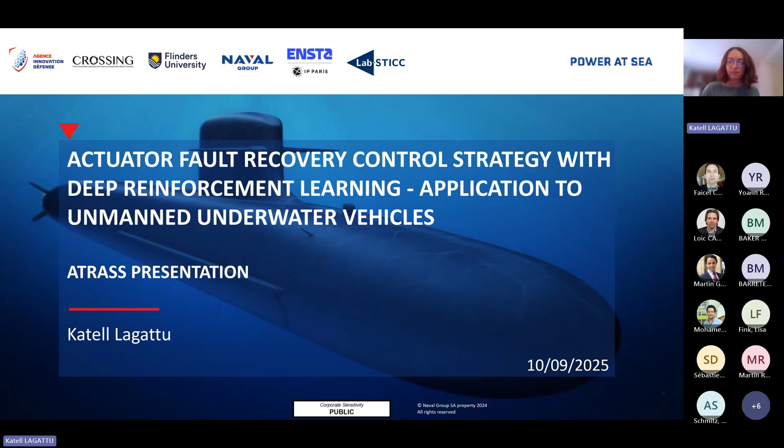My name is Katell Lagattu, and I'm going to present my PhD, which is entitled Actuator Fault Recovery Control Strategy with Deep Reinforcement Learning, Application to Unmanned Underwater Vehicles. So let's start with a little bit of context.

My PhD is a Naval Group CIFRE Defense PhD with ENSTA Bretagne in collaboration with Flinders University. So I spent the first 6 months of my PhD in Naval Group at Ollioules. Then I spent 1 year and a half in Australia at Flinders University. And I finished my PhD for the last year in Brest at ENSTA Bretagne. And I will officially end my PhD at the beginning of next month.

So for this presentation, I will start by giving a small overview of the general problem. Then I will briefly talk about the state of the art, which will lead to the research statements. Then I will explain my proposed approach that will be tested on an application case. And I will finish by showing you some of the results that we obtained, both in simulation and in real world.

So first, let's start with the general problem. So we consider in my PhD autonomous dynamic systems controlled by model-based controllers. We can see here a classical closed-loop control with a controller relying on the feedback from the system dynamics to perform the desired motion. The model-based controller is based on this classical evolution equation, with f the evolution function of the system, which is known during the nominal condition.

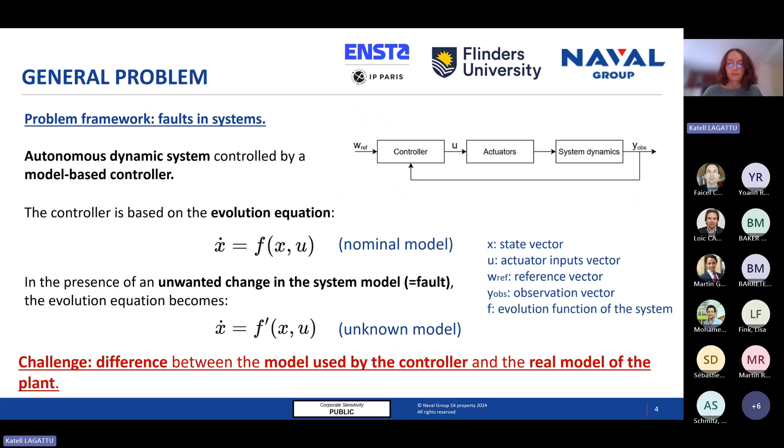The challenge here is that there is a difference between the model used by the controller, relying on f, and the real model of the faulty plant, which relies on f prime, that we don't know. This can lead to the risk of mission failure of the system, or in the worst case, the loss of the system.

So there are different types of faults that can occur in autonomous dynamic systems, for example, software faults or sensor faults. But in my PhD, we focus only on actuator faults. They can be partial, for example, a loss of efficiency of one actuator, or they can also be total faults, like a total failure or breakdown.

We make a few assumptions to start with in my PhD. The first one is, as we focus only on actuator faults, we will assume that there are no other disturbances, so no other fault and no external disturbances like marine currents or wind or anything. We also assume that the faulty system remains controllable, which means that the system has enough other actuators to be able to move in the desired direction despite the fault.

The objective of my PhD is then to develop a strategy to overcome actuator faults. This leads us to explore fault-tolerant controllers, which are controllers designed to recover from faults. The goal of fault-tolerant controllers is to address some key characteristics. The first one is optimal recovery performance, which is how well the system can perform despite the fault. There is also stability of the closed-loop control, which is essential.

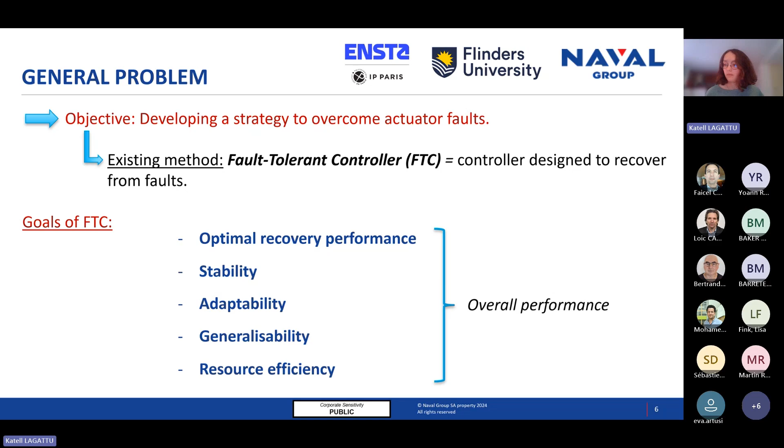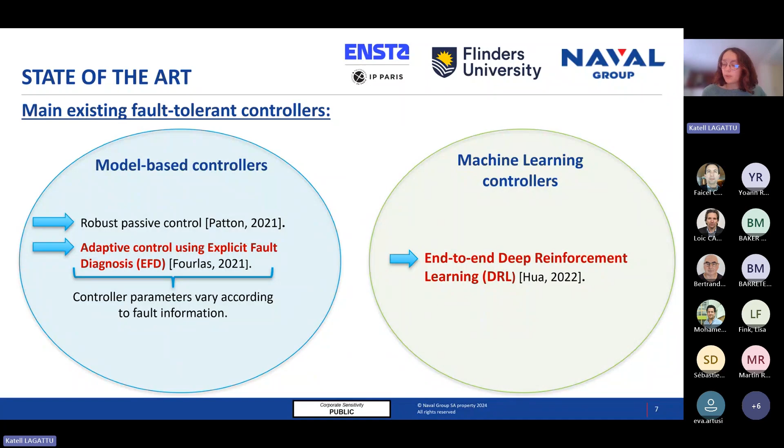And now let's see what already exists in the literature. There are two main categories of fault-tolerant control, model-based controllers and machine learning-based controllers. Among the model-based controllers, we can find robust passive control, but the most commonly used is adaptive control using explicit fault diagnosis, or EFD. In this method, the controller parameters vary according to the fault information. Among the machine learning controllers, the most used method is end-to-end deep reinforcement learning. So now we'll see in a bit more detail what these two main methods mean.

First, what is adaptive control using fault diagnosis? The first step of this approach is to obtain the fault diagnosis. This includes isolation, so the information of which actuator is faulty, and identification, which is obtaining the information of the extent of the fault. So for example, it can be the coefficient modeling the loss of efficiency of one actuator.

So it's important to note that EFD can be based on prior knowledge about the system model and the fault, or it can also be based on online estimation. So this means that it can also be estimated during the mission. Once the EFD is obtained, a control reallocation is performed based on EFD. So before talking about control reallocation, let's first understand what control allocation is.

So classically, in a controller, we have two different blocks. The first block is the control law, which takes as an input the observation from the system and which outputs the desired forces and torques, tau. And then the second block is control allocation, which converts the desired forces tau into actuator inputs U. And this is done through the control allocation matrix, H.

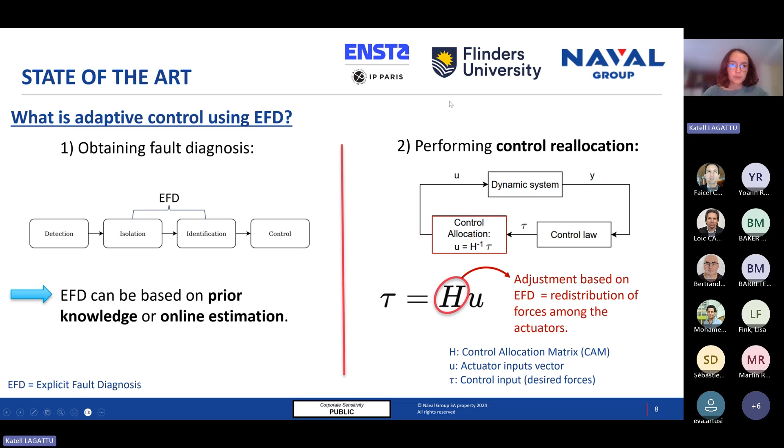So now to understand the second type of existing method, we need to see first some key elements about what is reinforcement learning. So this involves an agent trained in an environment through trial and error. At each step of the training, the agent will take one action and will have from the environment a new state and reward. This is all done in the framework of a Markov decision process. And the goal of the agent is to learn a policy of action which maximizes the long-term cumulative rewards.

Basically, at the start of the training, the agent will take random actions because it will not be trained at all and will not reach the objective of the mission. Then, after a while, the agent will be able to take more meaningful actions because it will have updated its policy of action. So for example, it will be able to reach the waypoints, but not in an optimal way. And then if the training is efficient, at the end of the training, the agent will be able to reach the waypoints in an optimal way because it will have found a policy of action which is optimal and which maximizes the cumulative reward.

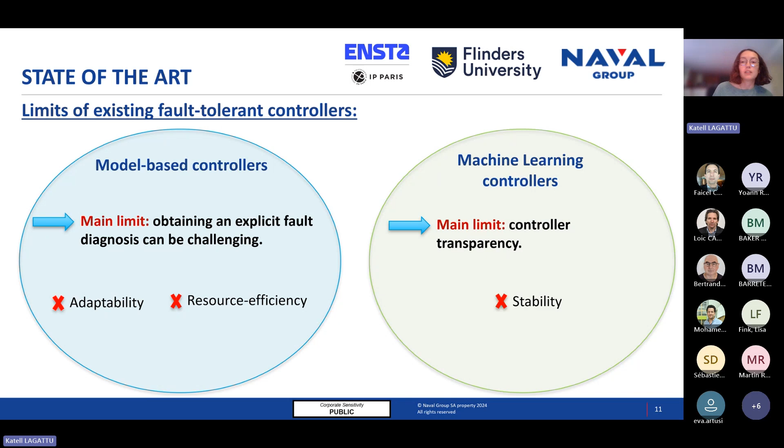Regarding the machine learning controllers, the main limit is the controller transparency, because neural networks are made of interlocked nonlinear functions, so the stability is very hard to guarantee. We often use the image of a black box of which we can't guarantee or predict the outputs. So this is why in my PhD, I made the choice of using a hybrid controller with both the advantages of model-based control and machine learning-based control to have both adaptability and stability.

This leads us to the thesis statement, which is: the combination of DRL and model-based control improves the overall performance of an autonomous dynamic system subject to actuator faults compared to existing methods. The main contribution in my PhD is the development of an adaptive model-based controller using DRL to adjust the control allocation matrix based only on observing the system's behavior.

So for the DRL part, the goal for the agent will be to learn how to adjust the allocation matrix, so to perform a control reallocation based on the observation of the plant. So this will allow us to have the adaptability of the DRL, and also this allows us to bypass the need for fault diagnosis. So why is that? It's because the agent will only rely on the observation of the behavior of the system. So basically position, orientation, and velocities.

The agent will not have any access or any need for the fault information. So it will not need to know which actuator is faulty or the extent of the fault. It just needs to observe the plant. And we will integrate this control allocation based on DRL into a model-based controller. So I will show you a bit later how it is done. And this will bring a certain stability.

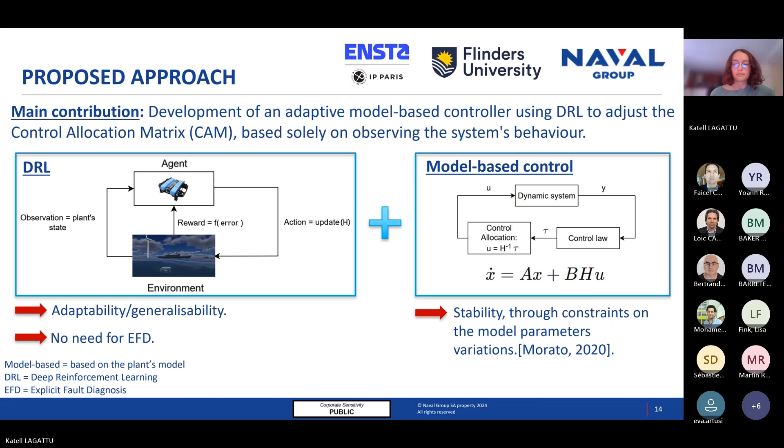We want to do that because it enables to maintain an optimal control in nominal situations, because we don't need to add the uncertainty linked to the DRL when we don't need it, when there is no fault. And also because it can reduce the number of scenarios that the DRL is supposed to learn during the training. So it's not supposed to learn the nominal conditions.

The detection threshold is defined and depends on the considered system. And it's important to note that it is very different from a diagnosis. We are not performing a diagnosis here. We just need a binary indicator saying if there is a problem in the system or not. So it's just about observing the behavior of the system.

So here is the structure of the proposed hybrid controller. We have a reference vector, which includes the desired movements, then a model-based controller, which integrates the control reallocation process. The control reallocation process is performed thanks to a trained DRL model that was trained in simulation. And we also add a post-processing step.

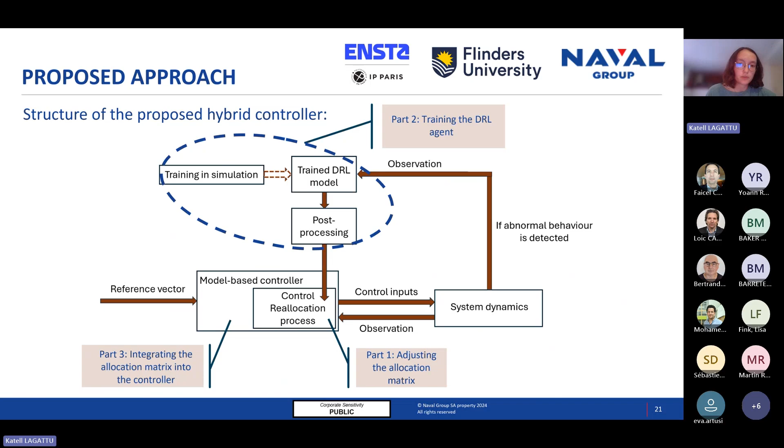So in order to ensure the stability of the closed-loop system, the control allocation matrix H must be included in the controller gain computation. For this, the controller gain, that we note K here, will be computed not only as a function of the classical matrices A and B, which are the state and input matrices, but also as a function of the control allocation matrix that we integrate in the equation. And this control allocation matrix is adjusted by the DRL. So basically, the gain K is calculated to ensure stability, and it will be a local stability because it will be recomputed at each time step.

We can see here a summary of the whole process. At each time step, the DRL model will receive from the system an observation and will produce an action, which are the weights. The weights will adjust the control allocation matrix integrated in the computation of the gain K. And this gain K will be used to compute the actuator inputs of the system.

So it's interesting to note here that contrary to classical control, where there are two blocks, one block for control law and one block for control allocation, here we have only one big block because we integrated the control allocation process into the control law. So this means that there is only one block which outputs directly the actuators' inputs.

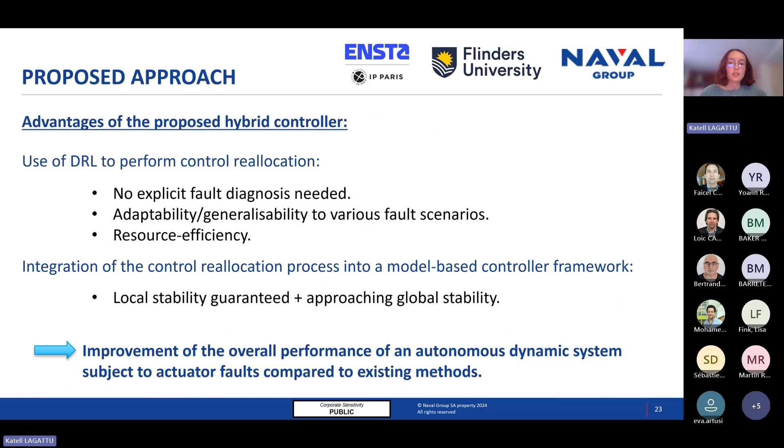And now we need to test this method on an application case. The application case that we chose here is autonomous underwater vehicle and thruster faults. We chose the BlueROV2 Heavy for the autonomous underwater vehicle, which is an AUV which has 8 thrusters and which can be used in defense applications, for example, mine detection or covering area or reconnaissance.

So here we can see the actuator configuration of the BlueROV2 Heavy. So it has 8 thrusters, 4 horizontal and 4 vertical. In my PhD, the focus is on the 4 horizontal thrusters that we name T0, T1, T2, and T3, and which control X, Y, and yaw directions.

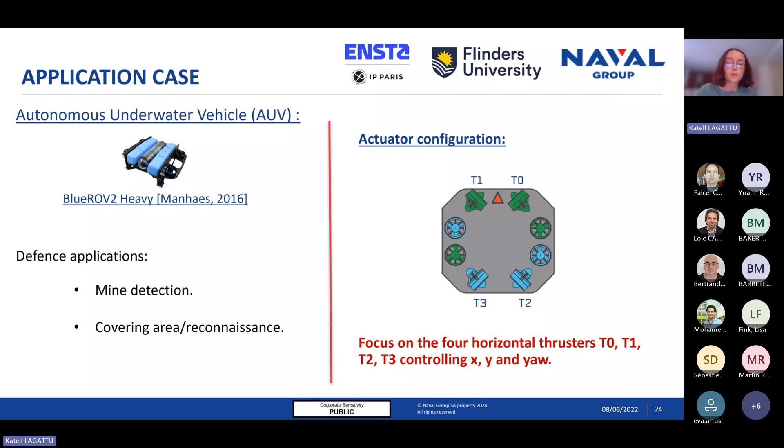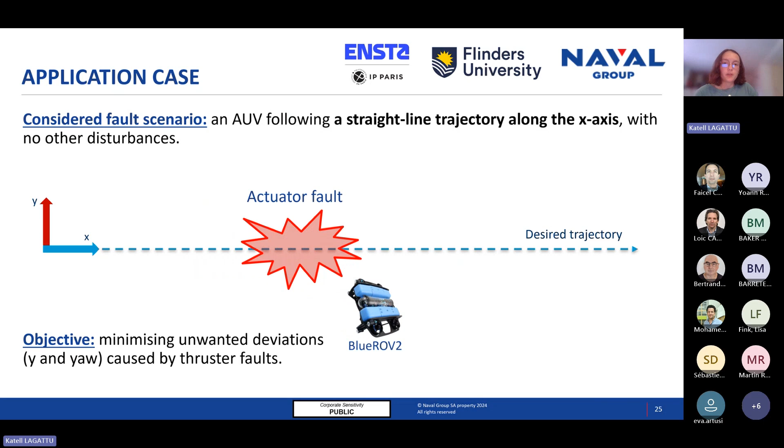So let's consider this fault scenario. We have this AUV following a straight line trajectory along the x-axis with no other disturbances, so no wind and no currents. An actuator fault occurs during the mission, which leads to translation errors and rotation error along the y and yaw directions. And the objective is to minimize these unwanted deviations along the y and yaw axes caused by thruster faults.

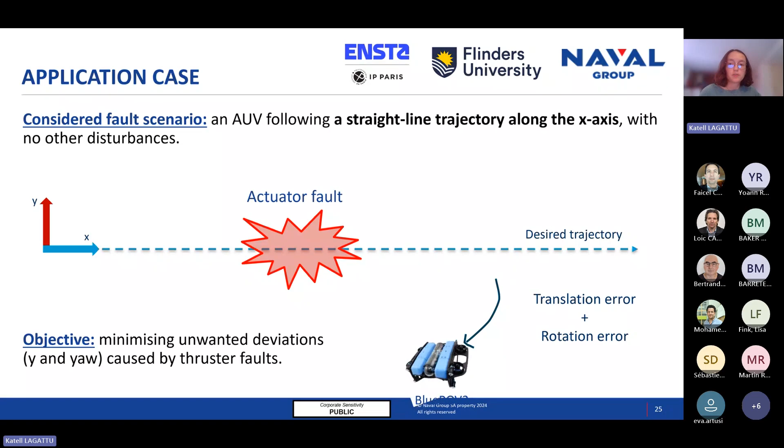To apply the proposed approach to the BlueROV, we need to make some technical choices. The first one is the choice of the model-based controller. We chose for this the linear quadratic regulator, or LQR controller, because this is a standard controller for linear systems, and the stability is quite straightforward to guarantee. For the choice of the DRL algorithm, we chose the soft actor critic, and we validated this choice in a first article for a conference.

For this application case, we added a working hypothesis. We assumed that the state of the AUV, so position and velocity, is known, because as we focus on control, we assume that the navigation part is okay.

Now, for applying the proposed approach, as we focus on a scenario where we only follow the x-axis, we will consider only the first line of the control allocation matrix, which is associated with the x-axis. So the DRL model will output only 4 weights W. And the weights are the output of the DRL model trained in simulation.

Now, in order to apply the proposed approach, a DRL training has to be carried out on the BlueROV2 Heavy. The issue that arose in my PhD is that training DRL models directly on physical AUVs is very impractical due to time, energy, operational costs involved, and there are also potential risks and material damage, and so on. So for all of these reasons, the training must be carried out in simulation.

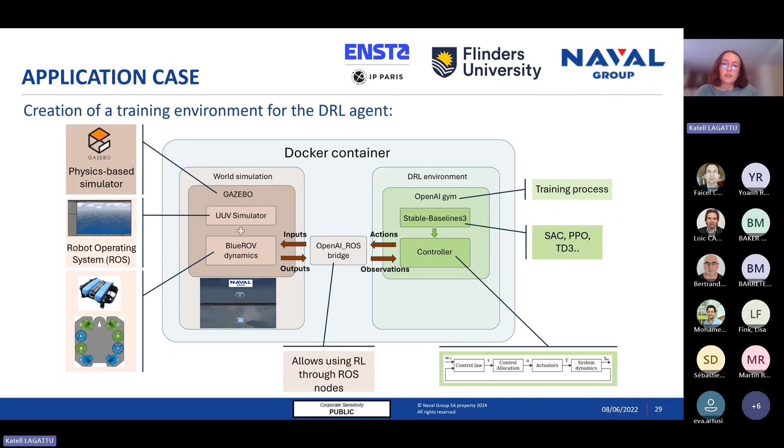For the DRL environment, the reward definition and the observation and action space definitions will be in an environment called OpenAI Gym, which is very common. And I also used a bank of algorithms named Stable Baselines, which includes several RL algorithms. And the chosen algorithm, soft actor critic, will directly influence the controller, as we saw earlier, so the controller which controls the BlueROV.

So now let's see the training of the DRL model, but this time applied to the BlueROV2 Heavy. So the environment is the underwater world of the BlueROV2 Heavy. The agent is the BlueROV2 Heavy. Its observation comes from its sensors and will include the Y and the yaw, because that's the direction impacted by the fault.

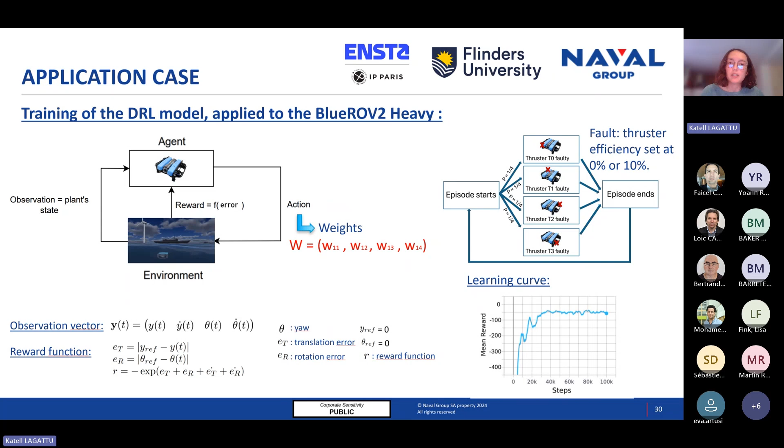Regarding domain randomization, at each episode, when the training starts, a random thruster is selected and its efficiency is set at 0% or 10%. So we do this because we want to focus on the more severe fault cases, and we will assess the generalizability of the DRL to overcome the less severe fault cases. We can also see here the learning curve of the mean reward, and we can see that it could converge after around 40K. So it took approximately 7 hours to converge.

I just want to show you what the training looks like. So at the beginning of the training, here we can see a small BlueROV evolving in the environment. It's supposed to follow a straight line, but here we can see that there is a big deviation because it's just taking random actions, so random weights, and it doesn't allocate well the forces. And here is at the end of the DRL training. So we can see that the DRL model could converge toward a policy which allows the BlueROV to follow a straight line despite the fault.

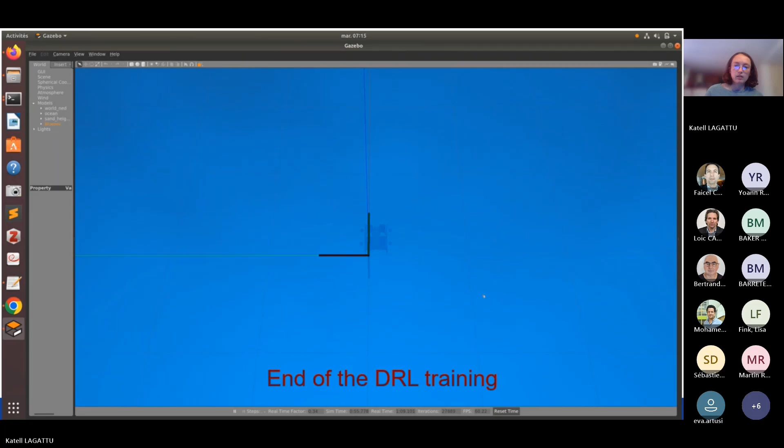Now that we have a trained DRL model, let's evaluate the proposed approach. So to do this, we compared the proposed approach to different other controllers. First one is a standard LQR controller to have a baseline for evaluating. Second one is a conventional gain-varying LQR controller. So the goal is to compare the proposed approach with another adaptive controller, but which doesn't use any DRL, in order to evaluate the advantage of using DRL. And the third one is the proposed approach that we will name in the following presentation LQR DRL.

We also compared all of these controllers to non-model-based PID controllers. So I will not talk about it in this presentation because it would be too long. But this was the topic of the third paper that I could present in Atlanta.

So now that I said that, there are two evaluation steps. The first one is the evaluation of the controllers in simulation with UUV Simulator to see how well the LQR DRL controller performs compared to the other controllers. And step two is the evaluation of all of these controllers in the real world with a physical drone, to see if we can apply our DRL model trained in simulation directly to the physical drone and how well it performs compared to the simulation.

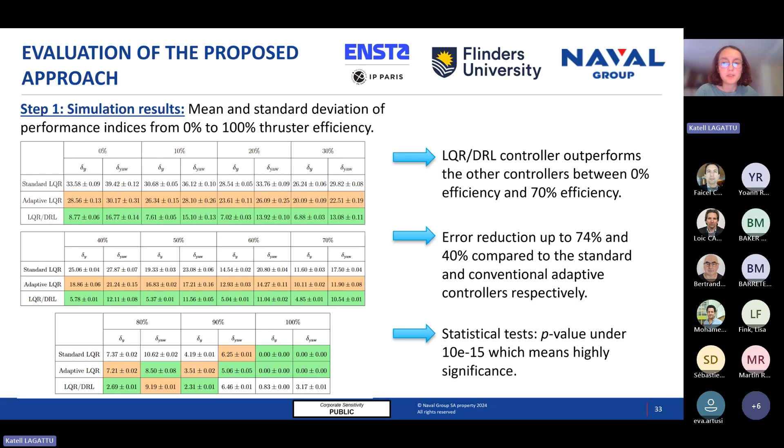So this shows the generalizability of the DRL model because it could overcome not only the faults seen during the training, so with 0% and 10%, but also less severe faults that were not encountered during the training. So this is because of the neural network's ability. Beyond 70%, the LQR DRL is outperformed by the other controllers, which makes sense because it's quite far away from what the DRL agent encountered during the training. We also performed statistical tests, and we computed the p-value, which is extremely small, which means that the results are highly significant.

Before transferring the DRL model to the physical drone, we wanted to first transfer it to a different simulator in order to assess its ability to adapt to a different world with different dynamics and slightly different modeling of the drone, to see if it's able to perform in different environments. So for this, we used the new Naval Group Pacific simulator called LotuSim.

So the scenario that we'll see here is when thrust efficiency T0 is set at 10%. On the left, we can see the green flag, which is the waypoint that the BlueROV is supposed to reach. In red, we see the trajectory of the BlueROV when controlled by a standard controller, so when there is no DRL-based control reallocation. And in blue, what is appearing at this moment, it's the trajectory of the BlueROV when controlled by our proposed controller, combining DRL and model-based control.

And we can see that, contrary to the red trajectory, the blue one can follow a straight line, and finally it will reach the waypoint. So this means that the DRL model could be efficiently transferred to a different simulation environment and could efficiently perform the control reallocation and overcome the fault.

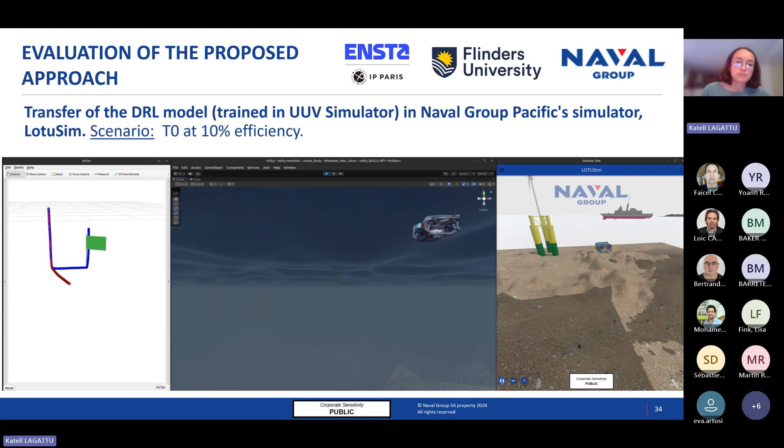So now step 2 is experiments on a physical BlueROV. So for this, I used the test pool of Flinders University in Australia. For the localization, I used an underwater camera tracking an Aruco marker, as you can see in the picture. I evaluated different scenarios of faults with various efficiency levels of the 4 horizontal thrusters.

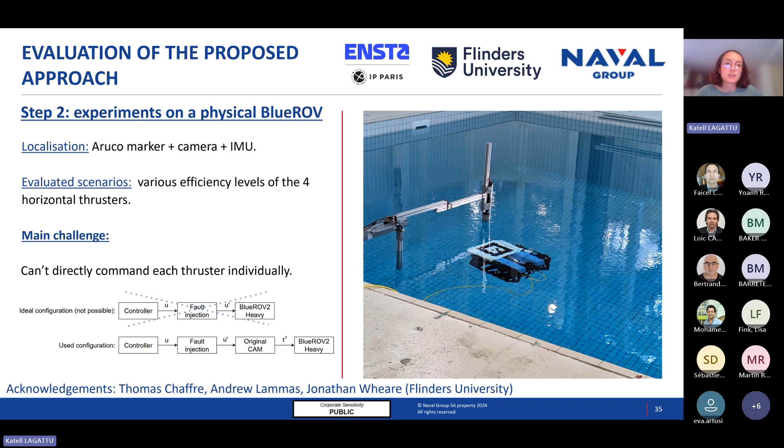I directly applied the DRL model to the physical BlueROV without any fine-tuning or anything, so it was directly applied. And all that is computing the input commands and the DRL model processing, it was done on a laptop, which was tethered to the physical BlueROV.

So here is a first result that we obtained. So first, I will show you the case where we use a standard LQR controller, so with no control allocation. So it follows a straight line, then a fault happens, and we can see that there is a big deviation because there is no control reallocation process. So it's just deviating and never recovering from the fault.

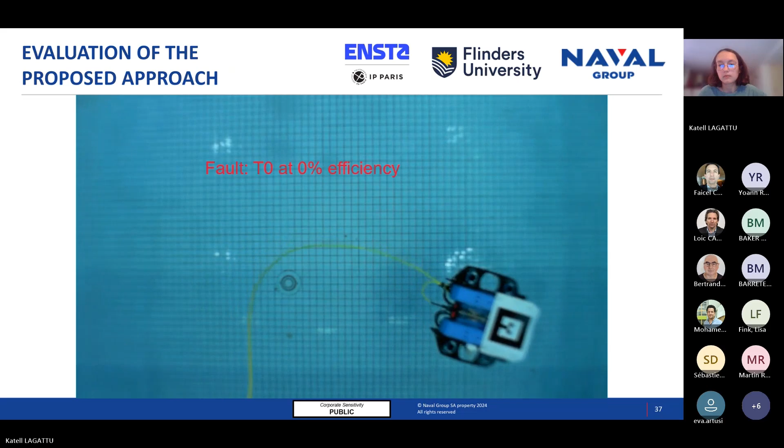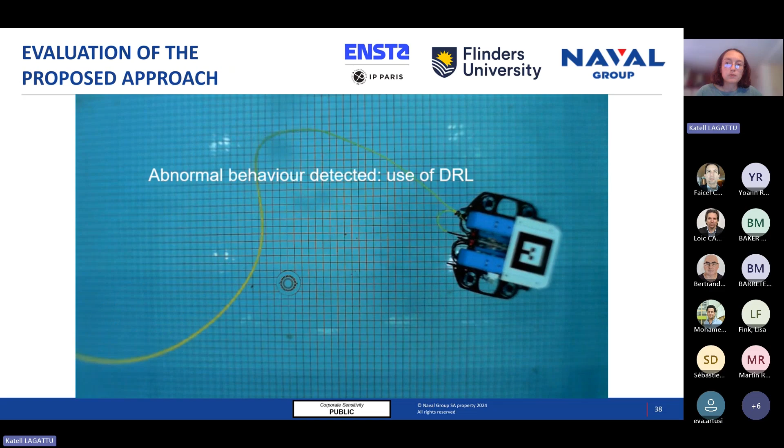And here we'll see the same scenario, but this time we will use our proposed approach. So a fault happens here. An abnormal behavior is detected, so we use DRL. And this allows a reallocation of forces to overcome the fault and follow a straight line.

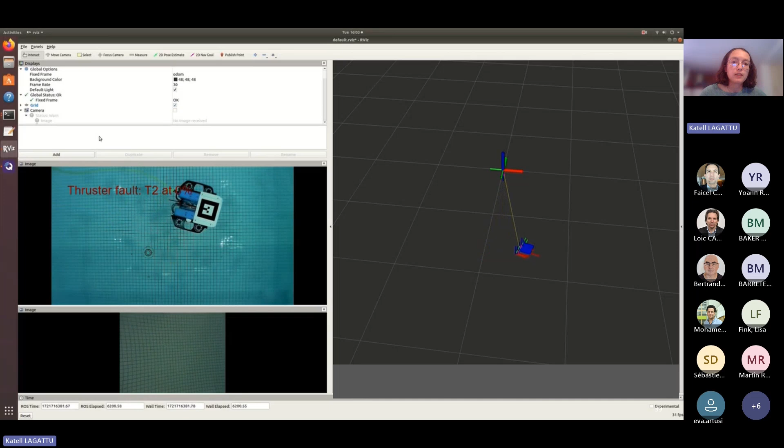Here is another example where on the right we can see also the position of the BlueROV tracked by the camera. So first case, we use a standard controller, so there is no DRL-based control reallocation. It's just standard, so we can see that there is a big deviation from the straight line. Yep.

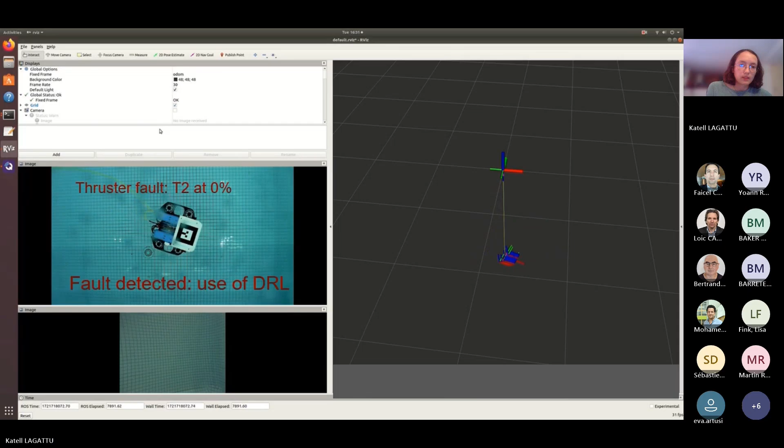And second video, this time we'll use our proposed approach when an abnormal behavior is detected. And we can see that instead of deviating, it will keep following a straight line with a minimal error.

So now let's conclude. So we have several thesis outcomes. First one is the development of a novel hybrid approach for overcoming actuator faults without any need for fault diagnosis. The advantage of the proposed approach is that we combine the adaptability of DRL with the stability of a model-based controller. We could validate this proposed approach in simulation and in real-world conditions. And we performed the comparison of the proposed approach with standard and adaptive existing strategies.

The results showed that the hybrid controller outperformed the other evaluated controllers in reducing trajectory errors induced by actuator faults. And we show also the generalization ability of DRL because it could overcome faults that were not encountered during training, even with similar resulting behavior.

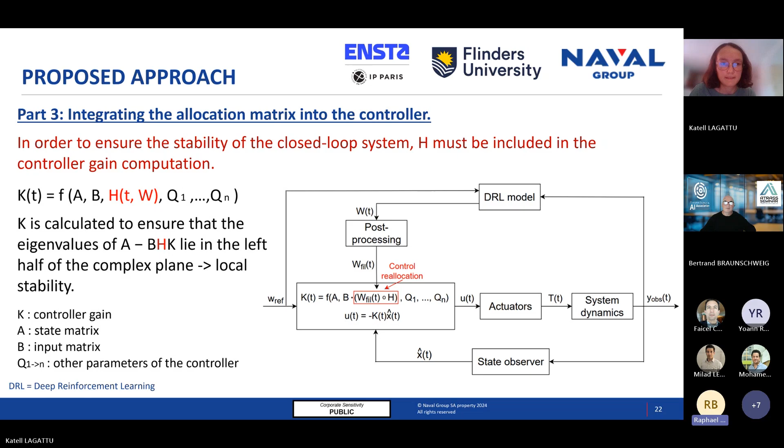Hi, yes, thank you for the presentation. Just a small question. At the beginning of the presentation, you said that you made the assumption for this PhD that only actuators can be faulty. So how do you imagine combining this with the rest if there are faults with the software, sensors, etc.? How do you think your system could cope with it? Because you make changes on the actuators, is it something that can be combined with other fault detection systems, or should it be generalized to all these kinds of faults?

Yeah, thank you for the question. We chose actuator faults because the principle of DRL is really to take actions according to an observation. So it was the most logical to use actuator faults and not, for example, sensor faults, because it needs to know its states. But we can definitely combine this actuator fault recovery with other types of fault detection and fault control. For example, we assume that there are no other disturbances, but we could use a sensor to measure the current and add it to the controller independently of this process.